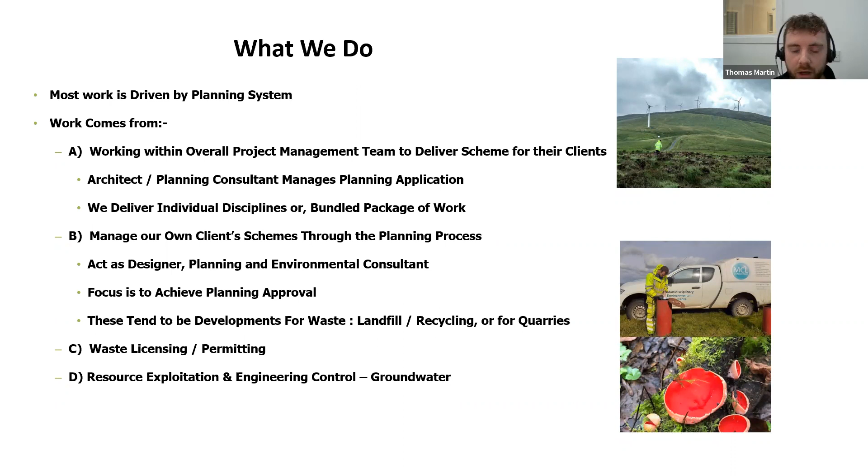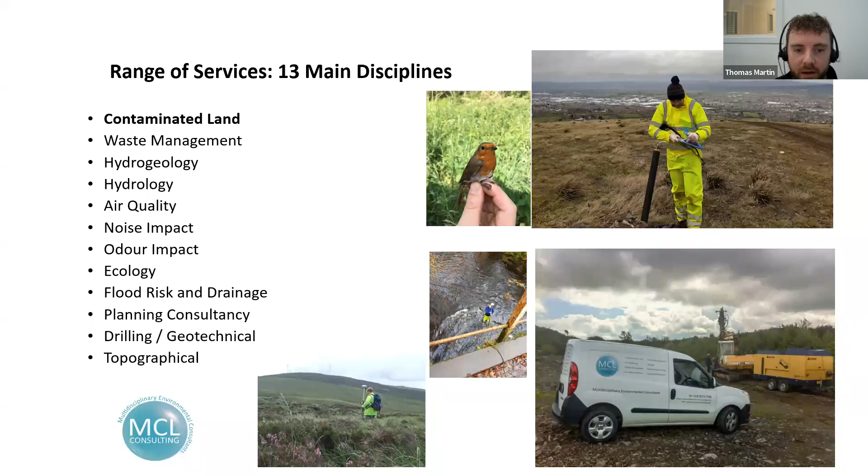Now, the relevance of contaminated land issues to the construction sector. During the planning process, MCL Consulting works with various disciplines to achieve planning permission for clients. Brownfield sites may come with certain planning conditions attached, which require the expertise of environmental consultants, and we can provide this expertise on discharging these planning conditions.

So when would you need a contaminated land assessment? First off, brownfield sites pose a potential human health and/or environmental risk. A contaminated land assessment is required if a site is currently brownfield land, i.e. previously developed, or is within proximity to potentially contaminated land. Examples of brownfield sites include garages, filling stations, gasworks, landfills, historical landfill sites, brickworks, manufacturing works, and former and current railway land.

This is just some guidance and legislation that we're obliged to follow. The list isn't exhaustive, but it's just a few that we follow. The main one is at the top, the Land Contamination Risk Management, known as LCRM. I'll go through that briefly now.

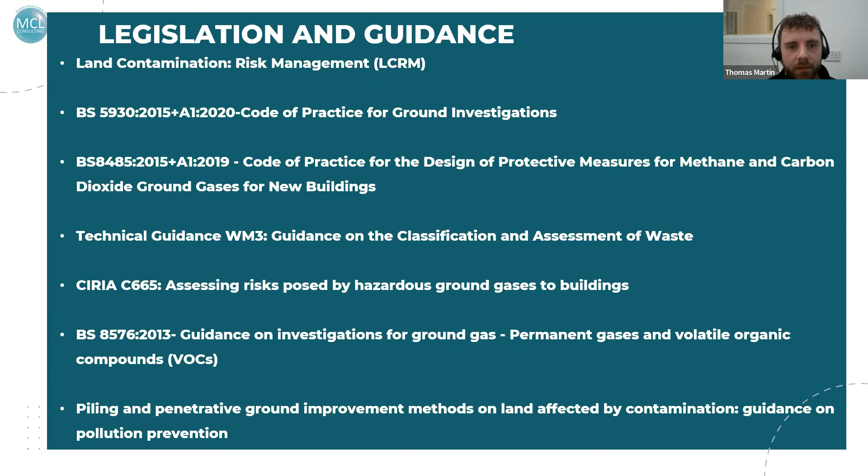The LCRM stages - essentially there are 3 stages. Stage 1 is your risk assessment, stage 2 is options appraisal. Both of the above are undertaken prior to planning permission being granted. Stage 3 is remediation and verification, which can be required to be undertaken during and after development works.

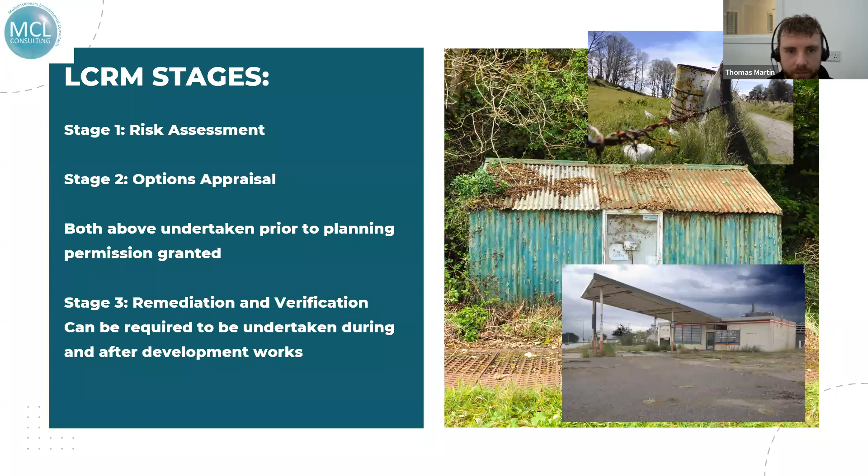Firstly, the stage 1 risk assessment. Basically, as I said before, it's undertaken prior to planning permission being granted. It's required if the site is brownfield land or within proximity to potentially contaminated land. It essentially develops a conceptual site model, which provides an overview of complete pollutant linkages. A pollutant linkage is basically a full linkage between source, pathway, and receptor.

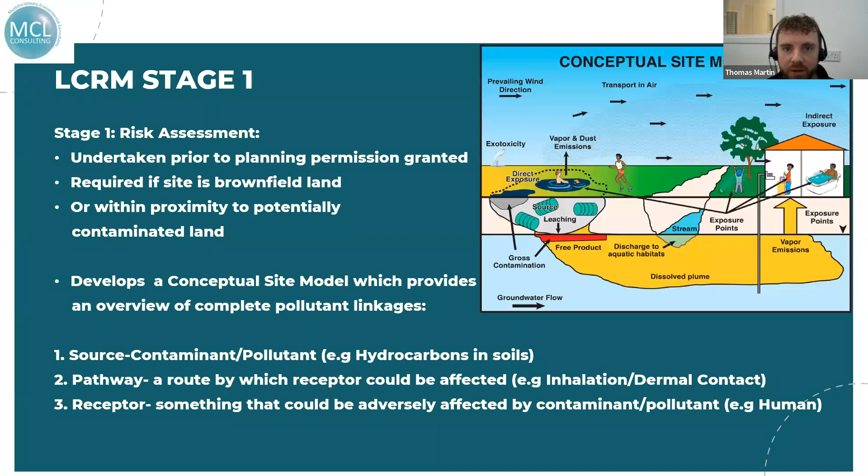So your source could be a contaminant or pollutant, for example, hydrocarbons in soils. A pathway can be the route by which your receptor could be affected, for example, inhalation, or dermal contact of the soils. A receptor is something that could be adversely affected by a contaminant or pollutant. So for example, human contact with hydrocarbons in the soil is a complete pollutant linkage.

The first stage is your preliminary risk assessment. This is a desk study exercise, including the following: a site walkover, review of historical and current ordnance survey maps, review of geological and hydrogeological maps, understanding of the environmental setting of the site, identifying types of contaminants likely to be present, and ultimately developing an initial conceptual site model describing any full pollutant linkages.

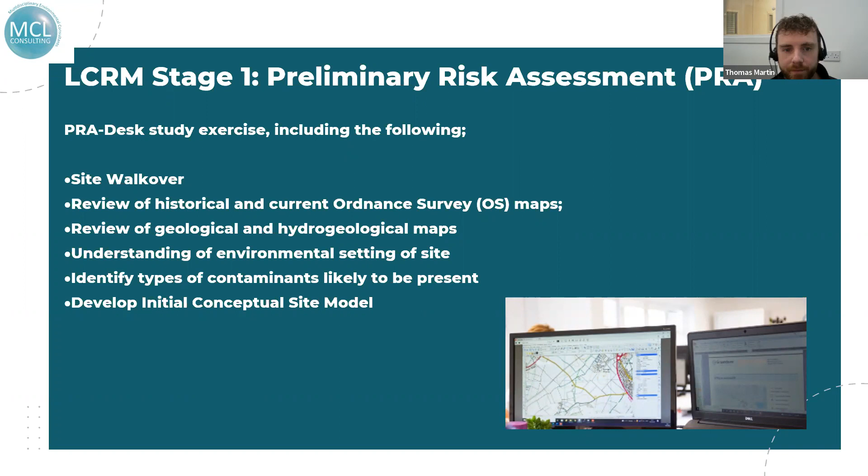Your preliminary risk assessment concludes either that no further assessment is required and the site is suitable for use - so it's unlikely planning conditions regarding contaminated land would be attached, and therefore construction can begin - or that further assessment is required, including site investigation and further monitoring to address uncertainties and complete the risk assessment.

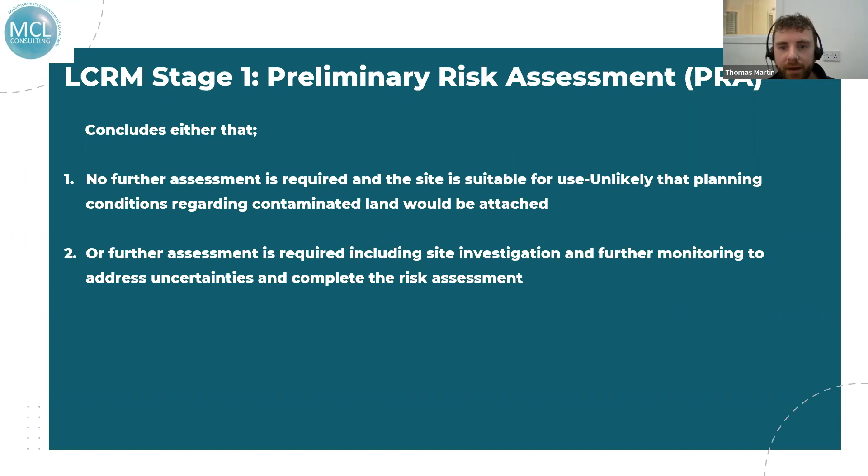However, if the preliminary risk assessment finds that there are unacceptable risks, then a generic quantitative risk assessment is required. This would entail further investigation, so a ground investigation consisting of boreholes and/or trial pits, collection of soil samples, groundwater samples, and ground gas data.

The collected results are then screened against relevant generic assessment criteria. However, just a point to note, a generic quantitative risk assessment is only acceptable to use if generic assessment criteria can be used. If not, then a more detailed quantitative risk assessment would be required.

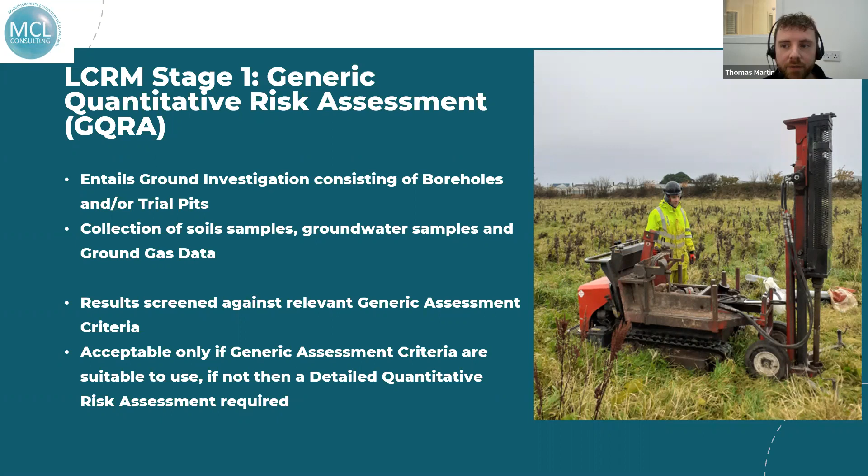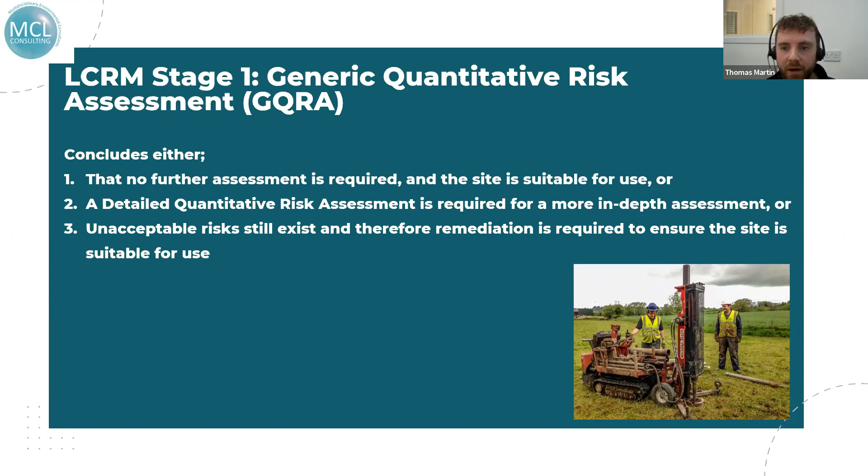The generic quantitative risk assessment then concludes either that no further assessment is required and the site is suitable for use, or that a detailed quantitative risk assessment is required for a more in-depth assessment, or that unacceptable risks still exist and therefore remediation is required to ensure the site is suitable for use.

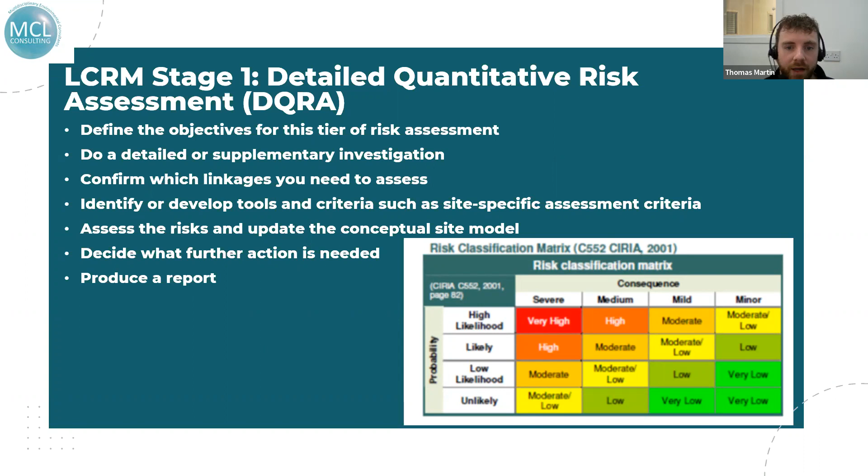This is just a summary of the more detailed quantitative risk assessment. It involves defining the objectives for this tier of risk assessment, perhaps including a more detailed or supplementary investigation, confirming which linkages need to be assessed, identifying or developing tools and criteria such as site-specific assessment criteria, assessing the risk, updating the conceptual site model, deciding what further action is needed, and finally producing a report.

However, one thing to note is regardless of what the GQRA finds, we always have to implement this statement: even if the GQRA defined that the site was clean with no contamination, should the construction works then begin and find potentially contaminated soils, for example, the works must stop and NIEA, environmental health, must be notified, and environmental consultants should be asked to come out to site and assess any potential risks.

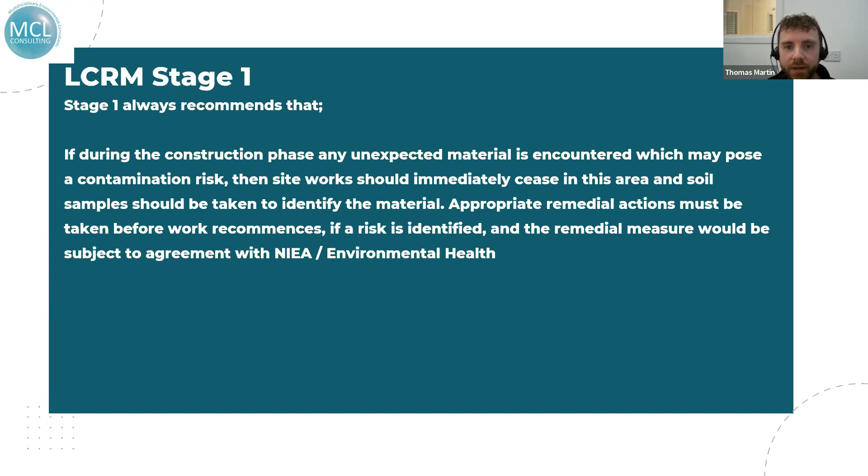Then stage 2 of the LCRM process is the options appraisal. This requires identifying feasible remediation options, doing a detailed evaluation of options, and then selecting the final remediation option. For example, contaminated soils could be bioremediated or dig and dump, or you could use combined approaches on bigger sites, in various different sections of the site.

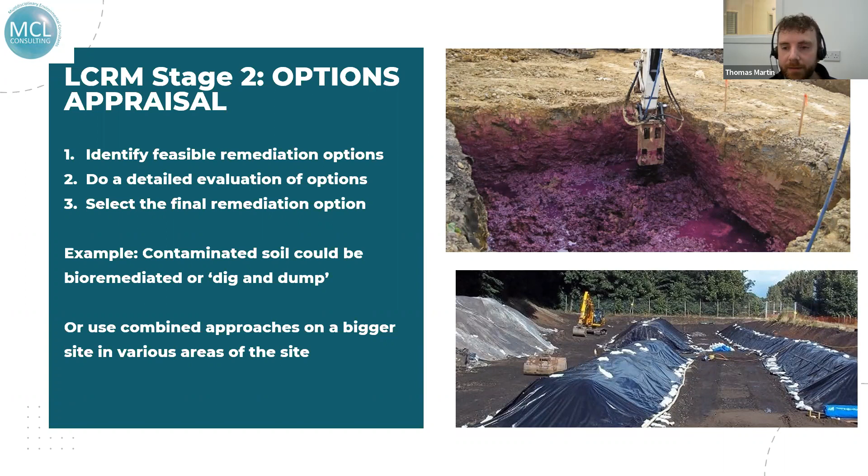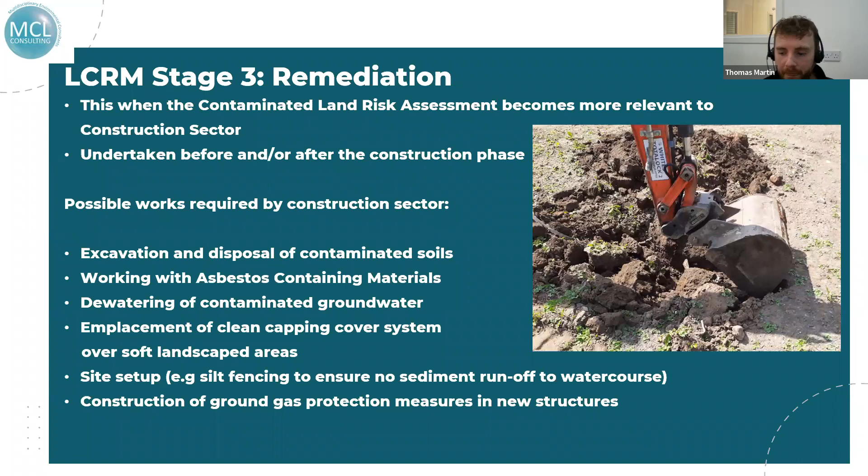Then the remediation stage - this is when the contaminated land risk assessment process becomes more relevant to the construction sector. This can be undertaken before and/or after the construction phase. Possible works required by the construction sector include excavation and disposal of contaminated soils, working with asbestos containing materials, dewatering of contaminated groundwater, emplacement of clean capping cover system over soft landscaped areas, site setup such as emplacing silt fencing to ensure no sediment runoff to a nearby watercourse, and construction of ground gas protection measures in new structures.

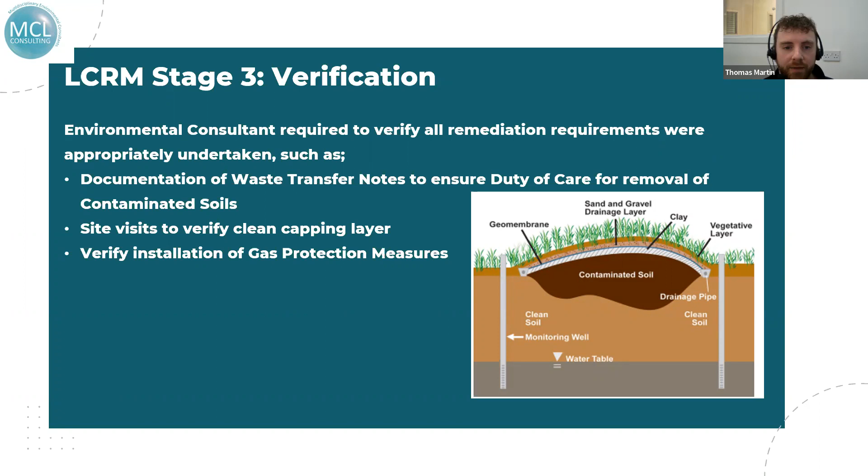Then after the remediation has occurred, verification is the next step. This is where environmental consultants would come out to site and verify that all remediation requirements were appropriately undertaken. This can involve documentation of waste transfer notes to ensure duty of care for removal of contaminated soils, site visits to verify clean capping layers, and verifying the installation of gas protection measures.

There may be planning conditions attached after the PRA and GQRA risk assessment has been undertaken, attached by Environmental Health or NIEA, which is relevant then to the construction stage. These could include the remediation previously mentioned, such as removal of contaminated soils, construction and environmental management plans, groundwater and surface water management plans, piling risk assessments, and the verification stage, basically verifying that all remedial measures were appropriately dealt with.

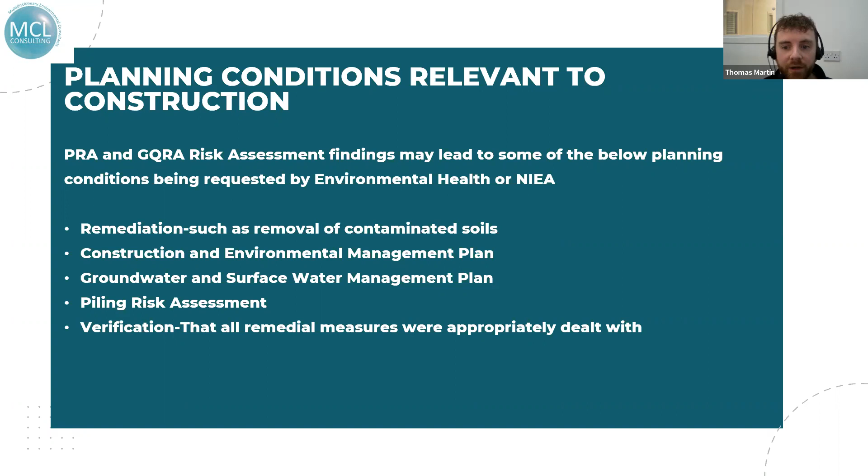The contractors are usually charged with remediating and verifying the works. So for contaminated soils, for example, this may require delineation of hotspot areas required to be excavated. Hydrocarbons may have been detected in various areas of the site, but not everywhere, therefore only certain high-risk areas need to be excavated.

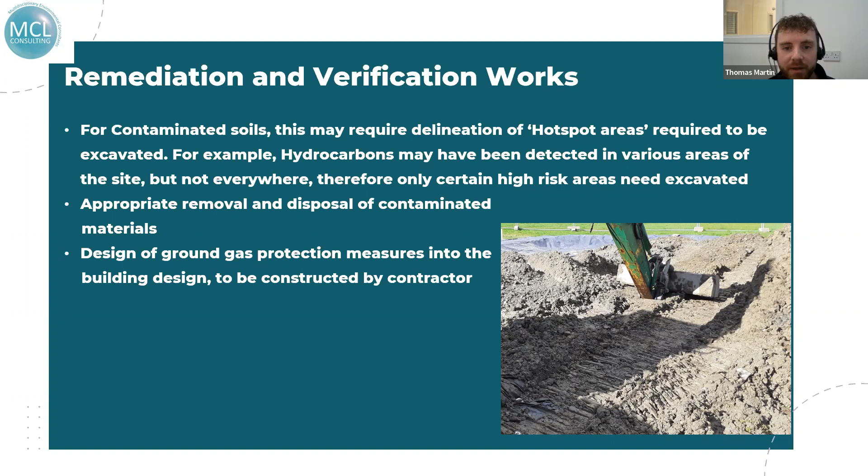The contractors will be in charge of appropriate removal and disposal of contaminated materials, and perhaps the design of ground gas protection measures into the building design, which are ultimately to be constructed by the contractor.

Soil capping verification is another work required. Sites with contaminated soils usually require at least 600 mil of clean capping layer over soft landscaped areas, or to the depth of buried services, which I'll talk about in the next slide.

The following process is usually required to be undertaken by the contractor: reduce the area to 600 mil below formation level, install a visual marker permeable membrane, for example orange mesh fencing across the area, and then emplace the 600 mil, usually in the order of 100 mil of crushed stone capillary layer, 300 mil of clean imported clay subsoil, and 200 mil of topsoil.

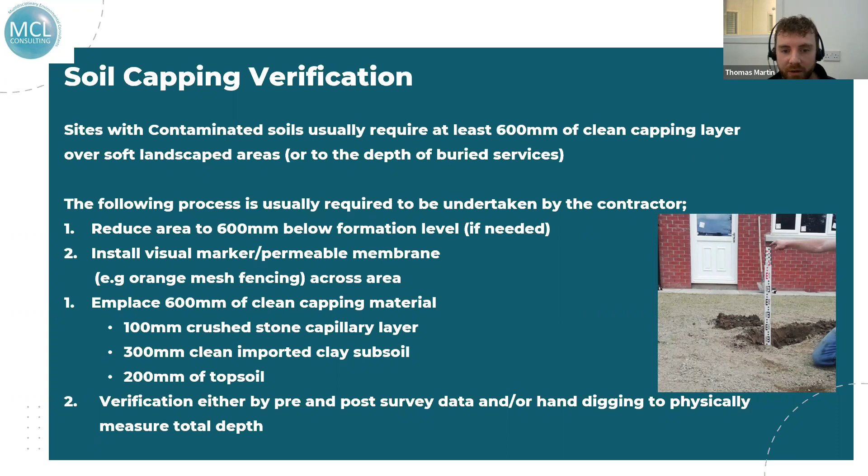And then this has to be verified either by pre and post survey data and/or just hand digging to physically measure the total depth, as can be seen in the picture there.

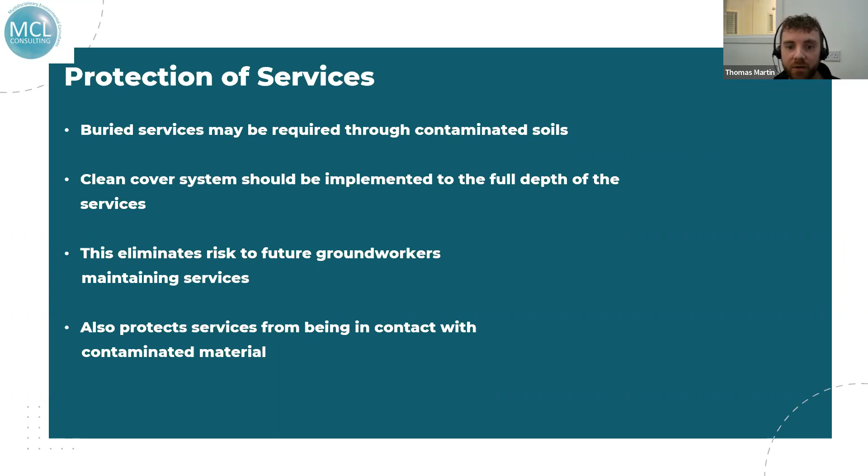Regarding the protection of services, buried services may be required through contaminated soils. Therefore, a clean cover system should be implemented to the full depth of the services. This eliminates the risk to future ground workers who maintain the services, and also protects the services themselves from being in contact with the contaminated material.

Another planning condition that may be attached is a construction environmental management plan. This can be required when there are risks to local environmental receptors from construction activities, for example, the risk to a nearby watercourse.

This may require the installation of silt fencing to stop sediment flowing into the watercourse, or the installation of silt busters and settlement tanks, visual inspections of watercourses by site staff, collection of surface water samples, liaising with NIEA throughout the construction stage, putting together a site waste management plan specifying procedures for collection, storage, and disposal of all waste products, protection of ecological receptors, and adhering to pollution response and spill procedures.

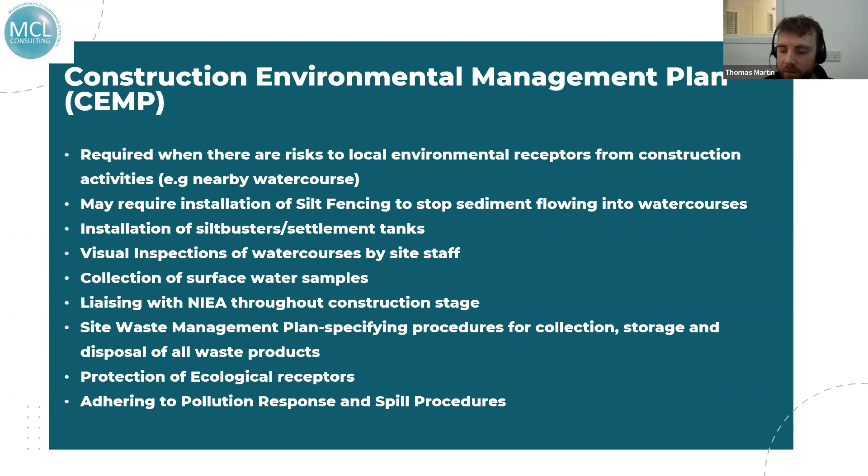Another condition that may be attached is the groundwater and surface water management plan. This could be required when building on a site which has contaminated groundwater. It basically ensures that construction activities are not adversely affecting the underlying groundwater or allowing for the mobilization of contaminants towards nearby watercourses. Boreholes may be built on site to allow environmental consultants to collect groundwater samples.

These will need to be protected throughout the construction stage. Access points kept for surface water sampling locations, liaising with environmental consultants for sampling dates and issuing reports to NIEA, and proposals for dealing with exceedances of parameters within groundwater or surface water, if any.

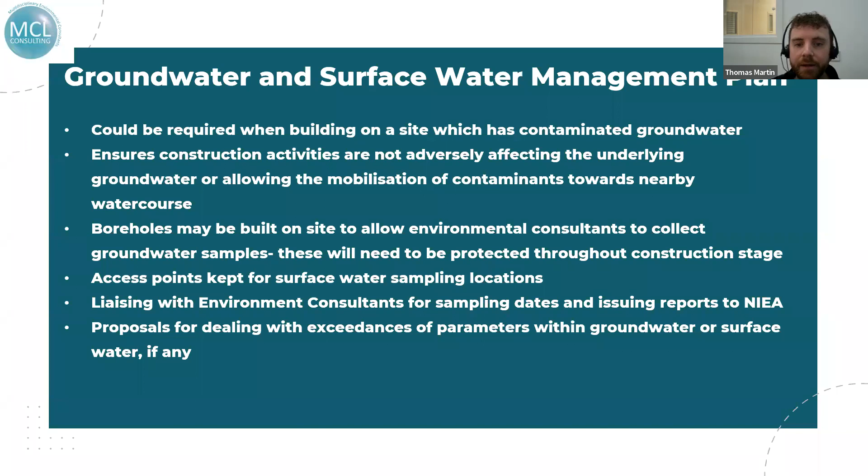Another condition attached to a planning application is the piling risk assessment. This can be required when piling on contaminated land due to risks such as the creation of preferential pathways through an aquitard or through a low permeability surface layer, direct contact from contaminated soil arising by site workers, direct contact of the piles or engineered structures with contaminated soil, and contamination of groundwater and subsequently surface waters by wet concrete, cement paste, or grout.

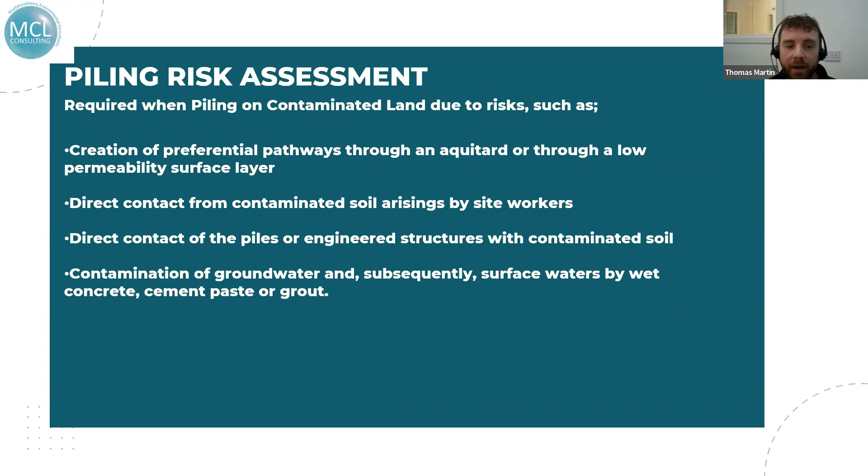Essentially, the piling risk assessment is carried out to ensure the most appropriate piling method is used to mitigate against these risks. It may be that the method chosen is the client's preferred method, or the method may have to change based on what the piling risk assessment finds.

This is relevant to this stage as some piling methods create waste arising of contaminated soils, and these soils will then need to be stockpiled for removal off-site. A site area will need to be set aside for the stockpiles, and waste management procedures will be required.

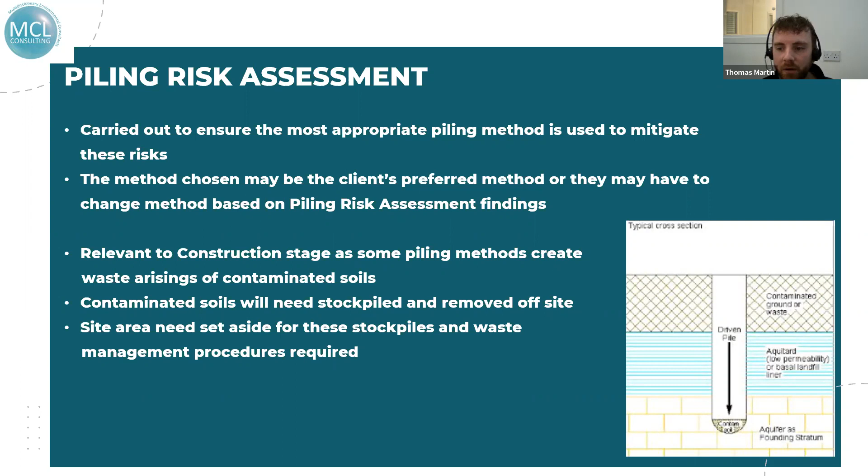The next topic we have here is waste classification. Regarding the analysis of waste classification, it's commonly assumed that WAC, waste acceptance criteria, is the only analysis required to determine which landfill type waste can be disposed to.

There's been a lot of times we've been asked by clients to come out to site and take a WAC sample, and we've had to explain that first we need to undertake WM3 analysis, and then WAC analysis if required.

Waste classification consists of WM3 analysis and WAC analysis. WM3 analysis determines if waste is hazardous or non-hazardous. If it's hazardous, waste must be disposed of at a landfill accepting hazardous waste, and that's essentially the end of the line for that sample. WAC analysis would not be needed for that.

However, if WM3 analysis determines that waste is non-hazardous, then WAC testing can be undertaken to further determine if the waste is inert or non-hazardous. A side note regarding asbestos, which I'll be talking about later: if asbestos is found greater than 0.1%, the sample is deemed hazardous, regardless of any other testing.

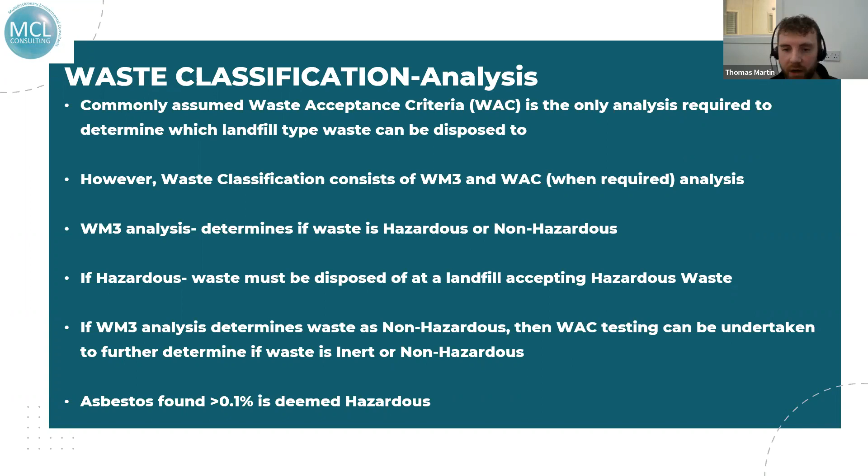From a financial perspective, the best approach to waste classification would be to collect samples for WM3 analysis first, as there's no need for WAC analysis if WM3 analysis returns samples as hazardous.

However, in practice, mainly because of time constraints, samples are analysed for WAC and WM3 at the same time. This means that the likes of ourselves will only come out once to sample, and then one report will be needed, which saves on time. Whereas if we were to test separately for WAC and WM3, there would be two site visits and two reports.

Regarding waste classification sampling, samples can be collected in situ prior to excavation works, so zones could be mapped out determining inert, non-hazardous and/or hazardous waste zones for removal.

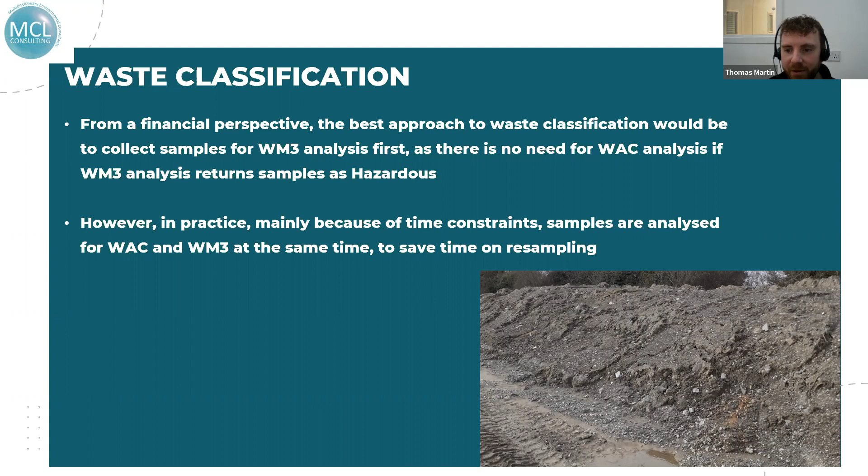Different soil types should be stored in separate stockpiles, and the stockpiles could also be zoned out for inert, non-hazardous and hazardous wastes.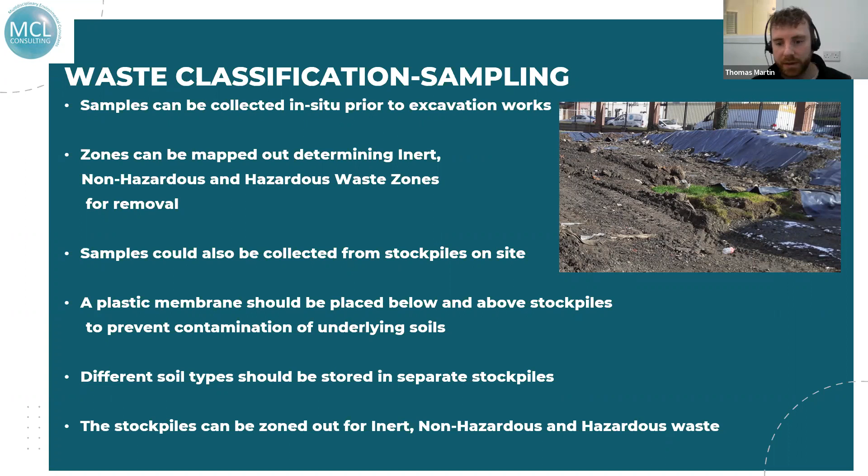From a financial perspective, it is recommended that samples are collected in situ prior to excavation, as this reduces double loading, saving time and money, since samples don't have to be excavated once for stockpiling and then excavated again for loading. However, in practice this is not always possible, so planning ahead can be useful to save on time and costs.

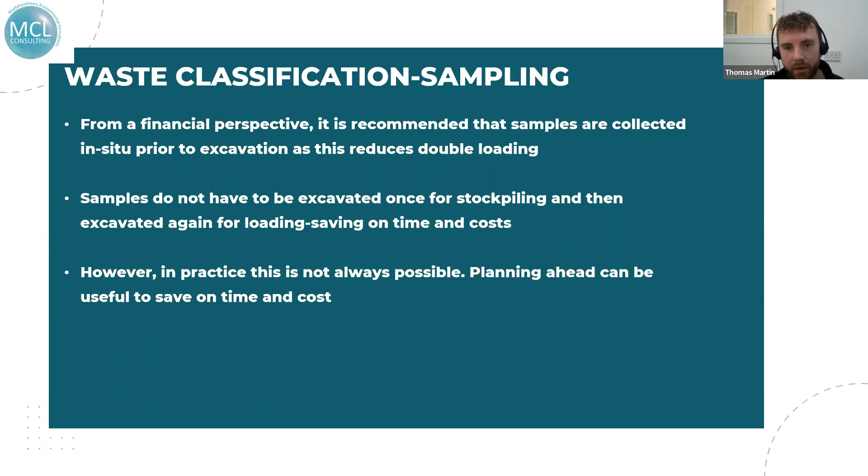Another aspect of building on brownfields or contaminated sites is the importation of soil. Clean soil will need to perhaps replace contaminated soil that's been removed off-site. Topsoils or subsoils can be imported to the site under a greenfield soil declaration.

Firstly, a notification needs to be made to the NIEA prior to the movement to site. Under a greenfield soil declaration, NIEA will therefore not regard this material as waste, so waste management controls aren't applied. For a greenfield soil declaration, both the source site and the destination site will require planning permission.

However, even with what's considered green, clean soil, the material will still be required to be tested for human health screening, as greenfield soil may still contain naturally occurring elevated levels of contaminants. For example, nickel can be naturally occurring in a lot of soils throughout Northern Ireland. The testing is usually done at one test sample per every 250 cube of imported material.

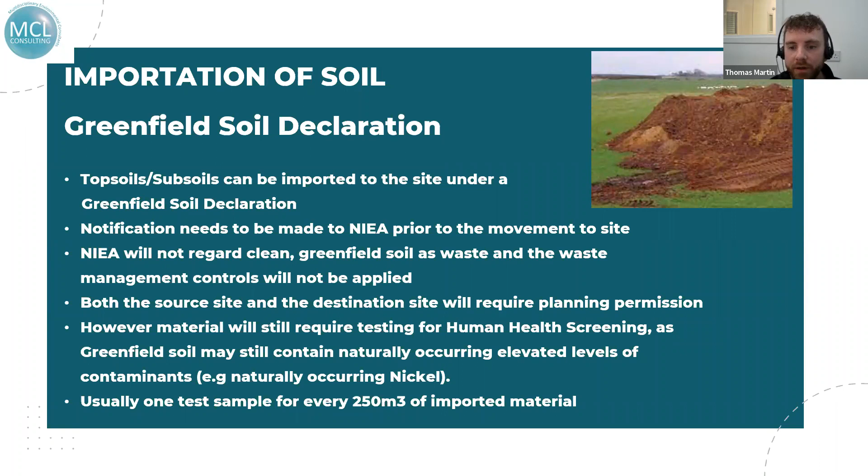It's also useful to note that testing should be taken at the source site, before emplacing material over the site you're developing, just in case it didn't pass the human health screening, in which case it would need to be excavated again and more clean material brought in. So you should always sample at source for best practice.

Soil from a brownfield site, or multiple brownfield sites, could also be imported to the site you're working on. The destination site requires a waste management exemption. The source site is required to have planning permission. And the material is also required to have one test sample for every 250 cubic meters of imported material.

An exemption must be in place before soil movements are made, and this process usually takes a month.

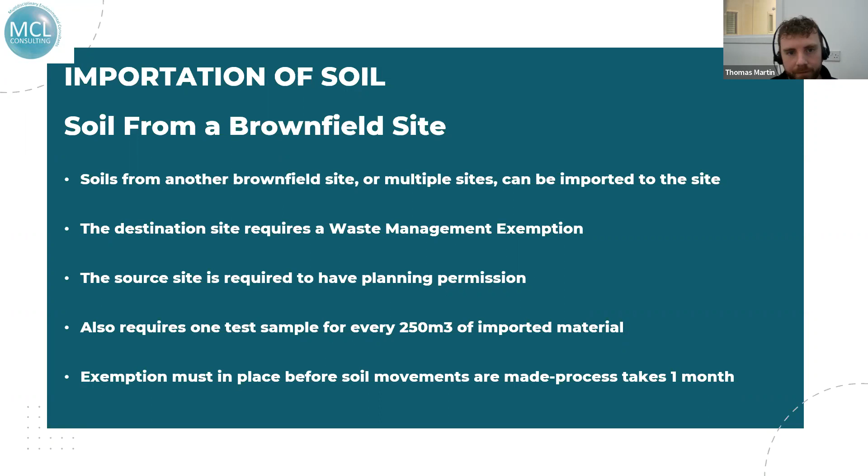Another aspect of working within contaminated sites is dewatering requirements. Dewatering foundations may be required anyway for various reasons on sites with a shallow groundwater table. However, if the ground investigation during the GQRA stage found contaminated groundwater, then dewatering would be required as a means to protect the workers and the surrounding environment.

Groundwater should be pumped, transported, and disposed of in line with waste management licensing regulations and the water order. This is because hydrocarbons in groundwater can affect workers' health through inhalation of vapors, and measures are required to prevent uncontrolled release of contaminated groundwater.

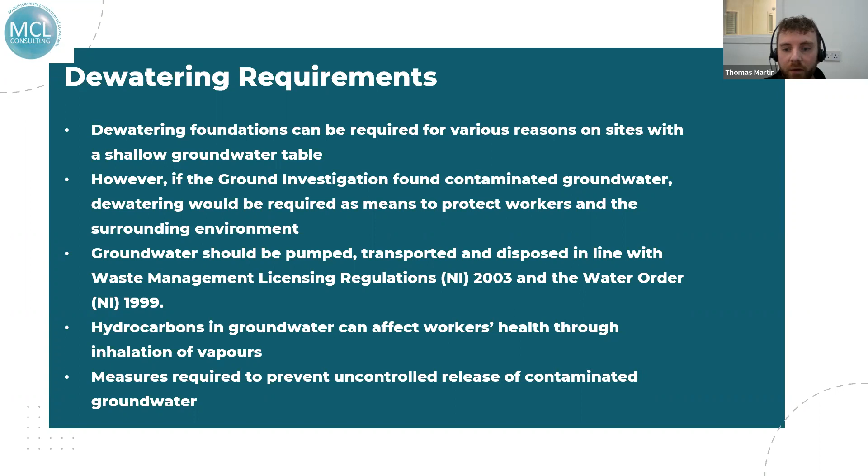Then on to asbestos. It's a hugely significant risk on brownfield sites given the historical widespread use of the material. It's found within buildings and soils consisting of demolished buildings and waste left on site. It's considered a human health risk via inhalation if detected within soils.

It's commonly assumed in places that there's a safe limit of less than 0.001% for human exposure. However, there is no safe limit agreed, and therefore the detection of any asbestos is a human health risk. Essentially, any detection of asbestos is a red flag.

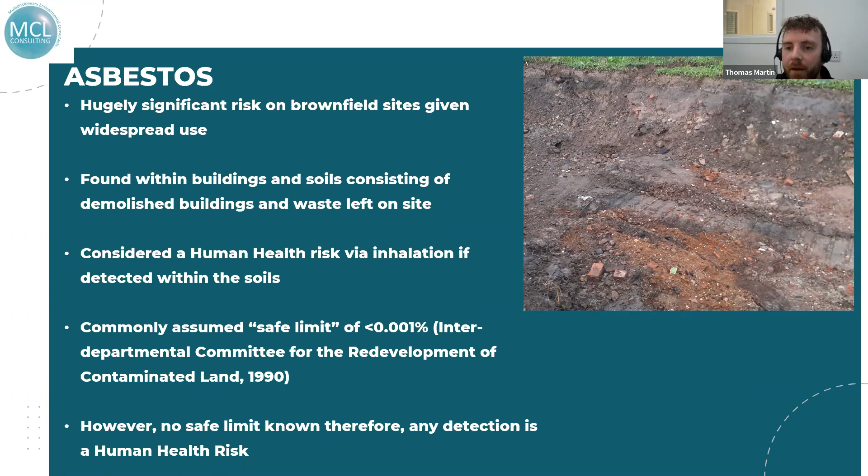That's a photograph actually taken by myself recently. There are asbestos fragments within the soils on that site. At the top of the photo it looks like a nice green field site, but once you start doing your ground investigation and taking trial pits, you soon see that the site was basically riddled with asbestos. That's highlighting why the first stages I talked about at the start are required before the construction stage occurs.

And then managing asbestos. So if asbestos is found within the soils, it can be remediated through being covered with hard standing or capping of soft landscaped areas. This is to avoid the risks of human contact.

Any excavations required should all be removed. So essentially, asbestos-containing materials should not be used for infill in other areas of the site. It's obviously all dependent on cut-fill calculations, but excavated material should never be used to infill other areas of the site to bring levels up.

But it's also acknowledged that it's costly to remove all asbestos-containing materials. So once final levels are achieved, these areas should be covered with clean imported material and/or hard standing, and this then acts as an engineered barrier to mitigating the risk of human contact with the asbestos in the soils.

However, what I've mentioned above is relevant to the protection of the end site users. So, for example, residents out in their gardens once a residential development has been completed. However, construction workers are exposed during the excavation and demolition works to the dangers of asbestos.

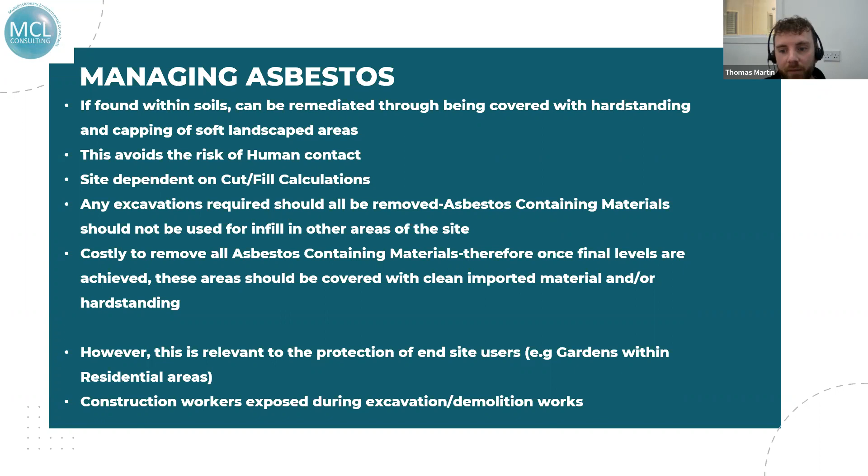So, regarding managing asbestos within the construction stage, only licensed asbestos contractors can remove high-risk, unbound asbestos. You must adhere to the Control of Asbestos Regulations, and the CDM regulations require that you determine whether there's a risk that the work might disturb any asbestos materials, including any potentially unidentified, presumed, or hidden asbestos, just like the picture I talked about a few slides previous.

And the removal of asbestos is required prior to the construction works beginning. Site areas should be marked out where asbestos was found, and during the removal period, and perhaps throughout the entire excavation stage and construction stage, the following should be employed.

Ambient air monitoring is required during the works to monitor asbestos in air concentrations, and full PPE should be provided to all workers.

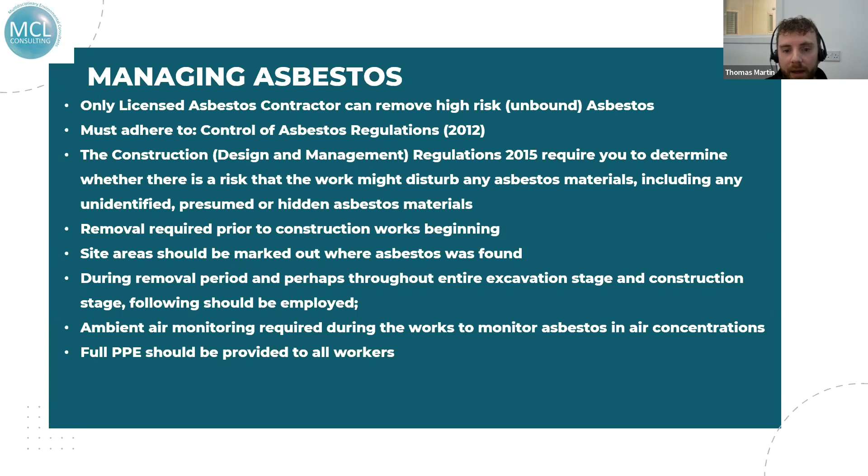And the next topic is ground gas. Certain sites could have a risk of ground gas, especially brownfield sites, because the made ground can be a source of your ground gas, or even a nearby site itself. For example, a historic landfill - ground gas could migrate towards the site that you're working on.

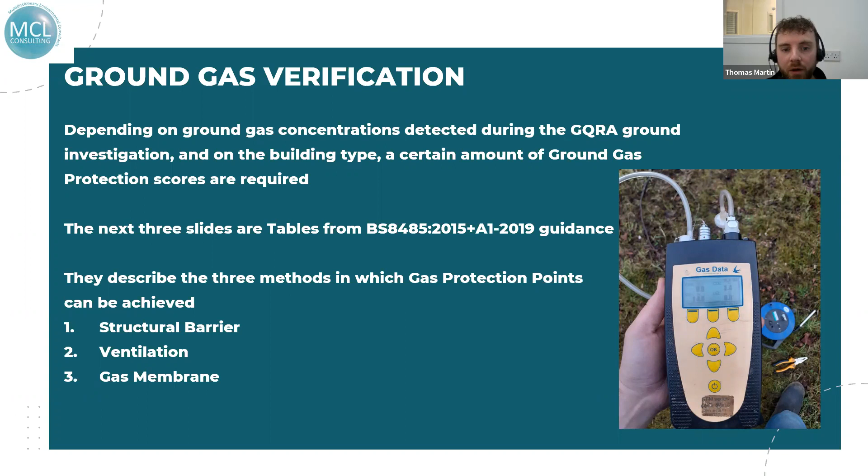So, depending on the ground gas concentrations detected during the GQRA investigation, and depending on the building type as well, a certain amount of ground gas protection scores are required. The next three slides are taken from tables in the guidance we use, BS 8485, which describes the three methods by which gas protection points can be achieved - through a structural barrier, ventilation, or gas membrane, or a combination of all three.

There are certain points achieved for the gas protection scores for the structural barrier. For example, the in situ ground bearing floor slab will give you 0.5 points.

Then there's the table for gas protection scores for the ventilation protection measures. For example, a passive subfloor dispersal layer can get you 2.5 points. And the gas protection scores for gas-resistant membranes could get you 2 points.

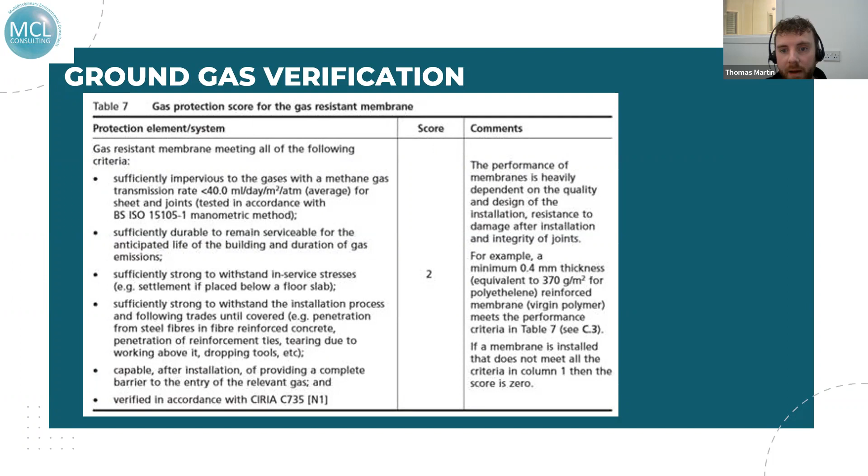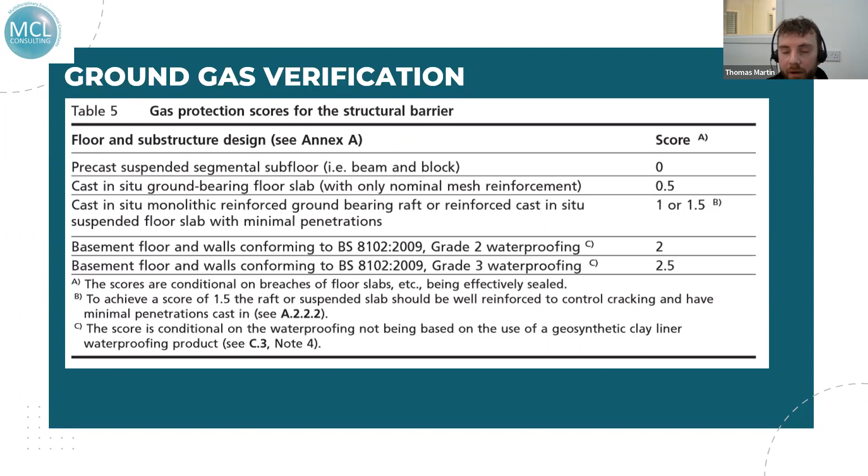So it may be that the building type you're working on requires, for example, 2.5 gas protection points. So a gas membrane, for example, would get you 2. And then if we go back to, say, a structural barrier, your ground bearing floor slab would get you 0.5 points, therefore achieving the required 2.5.

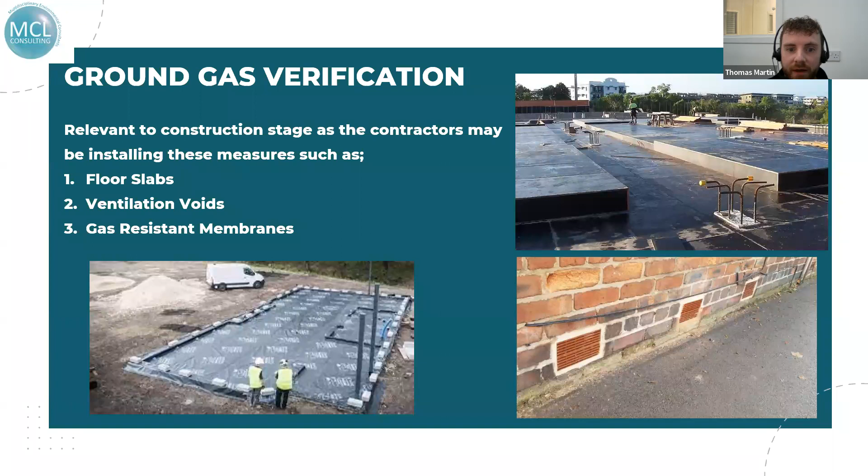And then ground gas verification - this is relevant to the construction stage, as contractors may be installing these measures such as the floor slabs, ventilation voids, and gas-resistant membranes.

So to conclude, in summary, working within contaminated land in the construction sector, prior to planning permission being granted, potentially contaminated sites need to be risk assessed. To start off, your desk-based studies and initial ground investigation help to achieve planning permission. And then once permission is gained, conditions may be attached which affect the construction stage - that's your remediation and verification that I mentioned earlier.

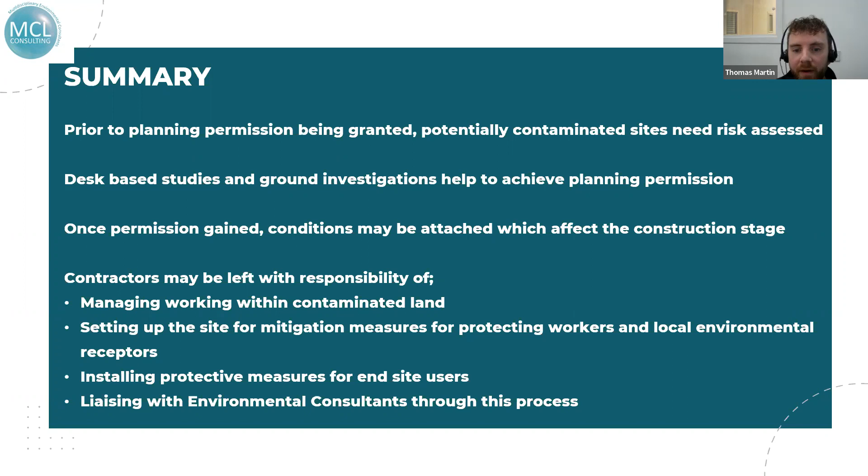And therefore, contractors may be left with the responsibility of managing working within contaminated land, setting up the site for mitigation measures to protect workers and local environmental receptors, installing protective measures for end site users, and then liaising with the environmental consultants through this process.

And then you would require the verification and remedial measures resulting in a suitable for use site. So ultimately, working within contaminated land, it's a rewarding process where you can see contaminated brownfield, unsuitable land transformed into a modern, suitable for use land.